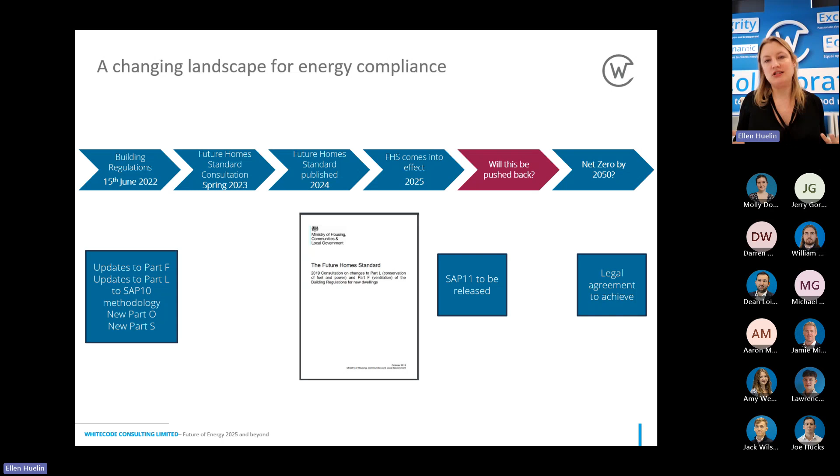The main thing here as well is that the government have made a legal agreement to meet net zero by 2050. So we've got to accelerate this carbon reduction quite quickly to achieve this. So this is where we're at the moment. I've put another timeline in, specifically to do with the Future Homes consultation. In December 2023, as I said, they released this consultation, and it very much gave the roadmap to what we're going to do over the next few years in terms of energy compliance for new buildings and conversions.

During that time, we've been reviewing it. Everyone can provide responses by the 6th of March. So if you feel strongly about any of these items, get on the website and respond, because every response is important, no matter how big or small. We're preparing a response to submit at the moment, and by the end of 2024 we're expecting a new set of approved documents to be issued, so a new Part L basically, based on the Future Homes and Building Standards.

Also this year potentially we're going to be having a general election, so this may affect it. Those of you who know about Part L 2013 and how long it took to get to Part L 2021 will know that potentially this could become a bit delayed as well.

So they've allowed either 6 or 12 months, depending on how the industry is responding, before they actually put the Future Home Standard into place. So sometime in 2025, probably in the spring, more likely I'd say autumn 2025, the Future Home Standard is going to come into force, which means that all your building sites that have not already started on site are going to need to comply with this.

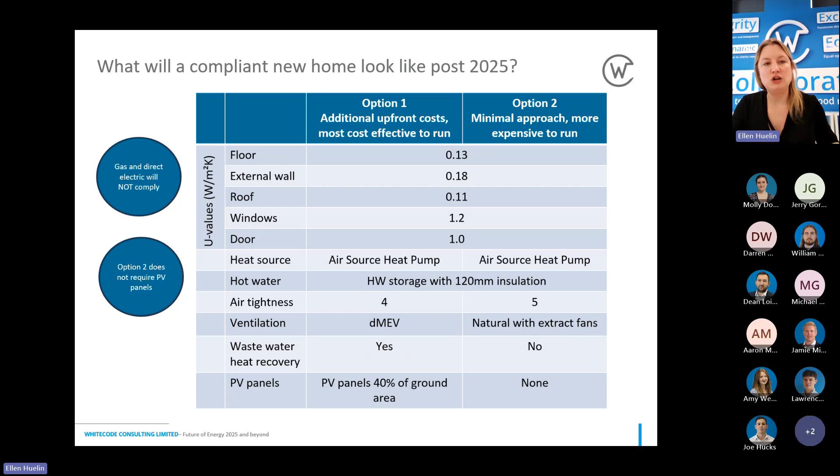I put there gas and direct electric will not comply. So we haven't really been using it so much, but outside of London, we can use direct electric under Part L 2021 and it still complies at the moment, if you add some other stuff to it, but for 2025, there'll be no gas, no direct electric. And as I said here, option two does not require PV panels. And I put the question here, should PV be mandatory?

Well, they've also added into the guidance that if you've got a large apartment block with 15 stories or more, it's proposed they won't include the PV panels in the notional dwelling because of the way that it's set up. So yeah, tall apartment blocks won't be required to have the solar panels. And those of you that have applications in the London area will know that generally speaking, we need to fully fill roofs with PV anyway to comply with the London Plan.

I won't go into it massively now, but it's likely the London plan wording is going to have to change in terms of energy, because what we just looked at there is currently achieving around 50% in Part L 2021. Under the Future Home Standard, that's basically just going to scrape a pass. So we're not going to be able to achieve that extra carbon reduction that the London plan asks for. So they'll have to change something there to fall in line with the Future Home Standard.

The other thing about PV, and looking just a little bit at houses specifically, is that if you're looking at 40% floor area of the house, the ground floor area, you've got a 3-story house, a bit like this one, with some dormer windows in the roof. The ground floor is 40 metres squared. You need 40% of that to comply. So I think that's the right amount actually, but you're going to basically need a certain amount of PV to comply with the air source heat pump and PV strategy.

And if you've got things like dormers or you've got east-west roofs and things like that, it's actually going to be quite challenging, I think, to meet that 40% requirement on your roof. So that's also something to think about. And I think we will be responding and saying we need to consider that it's not always possible to get your 40% floor area of PV on your roofs, depending on your design and orientation of the dwelling.

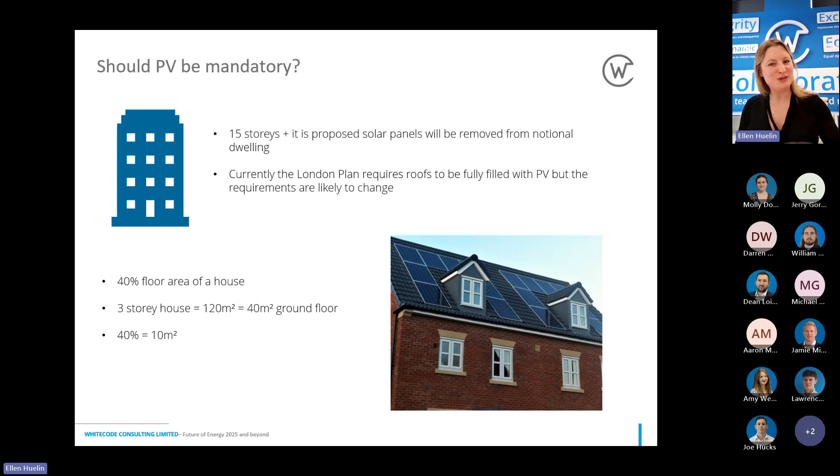I think in terms of the options, I personally would prefer to move into an option one house where you've got your air source heat pump and your PV together. And I'm going to show you why now. Because how much is it likely to cost? So these figures have been based on a 3-bed house. And this is information that has come from the Future Home Standard consultation. So they've done a bit of a cost analysis and I've basically just taken the numbers straight from there. So I didn't work these out myself.

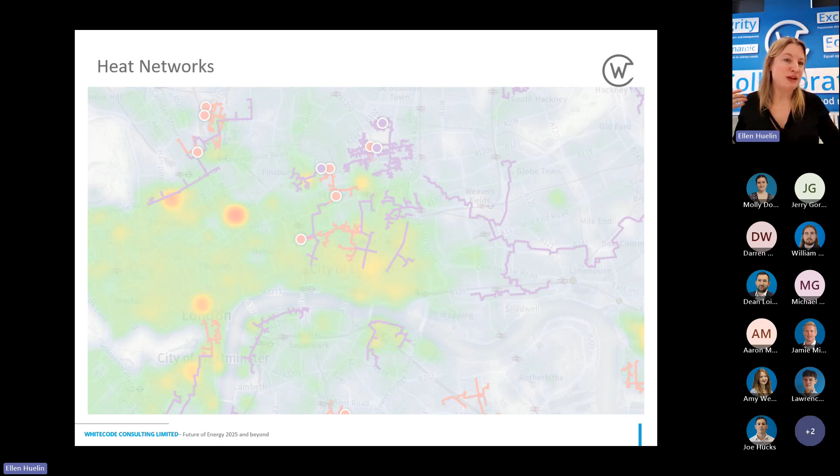Hoops to jump through to make sure that you can connect to it. However, obviously it needs to be part of Part L because it's being really pushed, especially in the London plan. So there's also a table that I put in here, which is the compliance if you're specifying a heat network. Everything else in option 1 and 2 remains the same, except the heat source, which rather than having an individual air source heat pump or a site-wide heat network, you connect to a 4th generation heat network, basically an air source heat pump.

And it has some minimum requirements, like the SCOP needs to be 3, and if you have really high primary losses, obviously it's going to count against you. So again, this is saying it needs to be a heat pump. There obviously are existing heat networks around London. You can see I showed you them in red there.

A lot of those have got gas-fired CHP, so you'd only really be able to connect to those if they start to decarbonise the heat networks and add in air source heat pumps and things like that. Otherwise, you won't be able to connect to those existing networks. So again, it's interesting to see what they're looking at. Whether it will actually work out in terms of heat networks, we shall see.

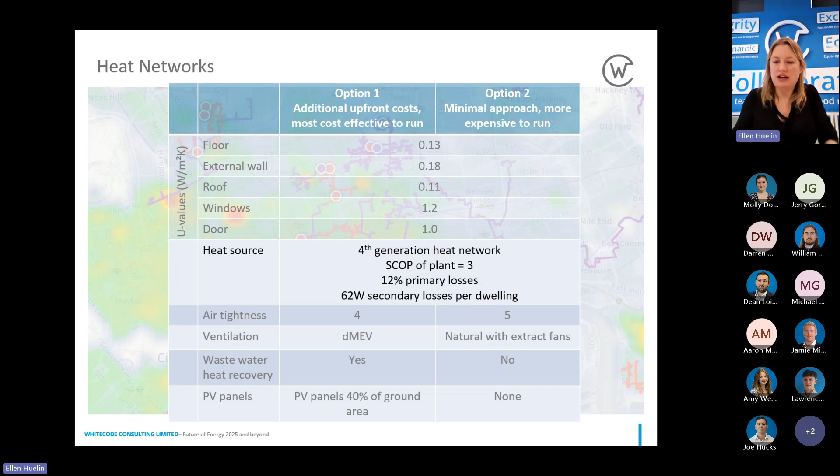Just to go then into non-domestic buildings. So with non-domestic buildings, the consultation is split between top lit buildings, which is like your warehouses, and side lit buildings, more standard commercial buildings like offices, schools, things like that. So there's a couple of different requirements for these because they are quite different types of buildings. In terms of fabric standards, as we've seen with the residential, they're going to be staying as 2021 standards. There's going to have to be an enhanced air tightness for the top lit buildings.

In terms of heating, you will be able to have radiant electric heating in the top lit buildings because, again, they're normally used for storage and things like that. But it will be air source heat pump for the side lit buildings like offices. This is not unexpected. Most offices have air source heat pumps, and new build offices have air source heat pumps now anyway. So these sort of things aren't unusual.

There will be an increased lighting efficiency required, up to 105 lumens per circuit watt as the minimum, and also an enhanced heat recovery efficiency. So these are the sort of standard assumptions. But again, there's going to be two options like we had for residential. So this is option 2, but it's the least preferred option, and it's to do with PV, and the percentage of floor area of PV that's going to be required.

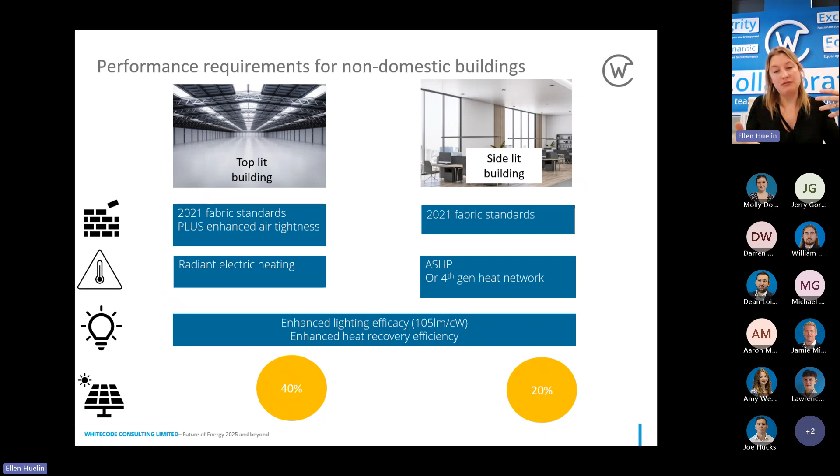So for top lit buildings, we're looking at the area of the foundation slab. Basically, you need 40% to comply. For side lit, it'd be 20% to comply. What they've said in the consultation is they'd actually prefer this option, which is option number 1, which is 75% for top lit buildings and 40% for side lit buildings.

So they're pushing people, saying, you know, we need to maximise the amount of PV on commercial buildings as much as possible. So I think really, in terms of Future Homes Standard, it's not a massive uplift to what we're currently doing. It's just this extra PV requirement, which isn't included at the moment. And there's a big opportunity to improve the energy efficiency of buildings by adding PV to them.

So this, again, will be in the consultation. People will be providing their comments to say, yes, we think option 1, this is why, yes, we think option 2. It looks as though it's going to go down option 1, which is the maximised PV.

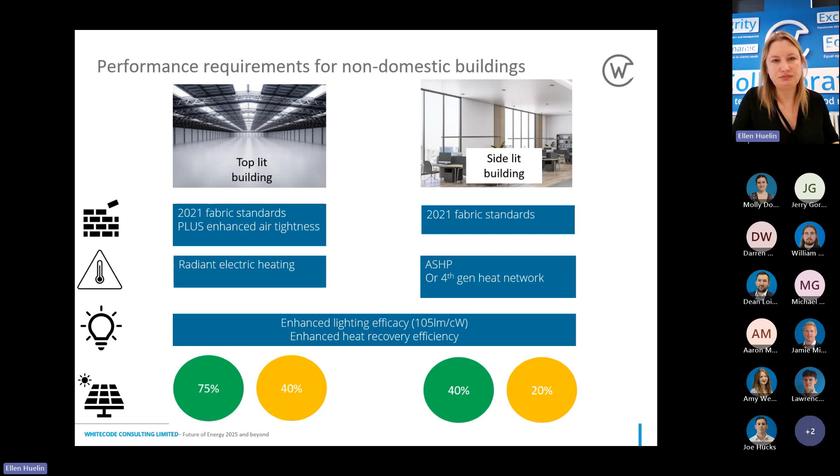In terms of services, some is for residential, some you can see is there for commercial, but the minimum coefficient of performance that is proposed for the heat pumps on the residential side is 3.5. That's quite high. Do we think many heat pumps can actually achieve that? Alex might have something to say about this later.

Yeah, so that's what's going to be going in as the minimum standard for heat pumps in residential, 2.5 for commercial. As I said earlier, we will need to improve the lighting to 105 lumens per circuit watt. That is also for residential. So at the moment, when we're doing our Part L 2021 calculations, we're putting in probably about 80, 90 lumens per circuit watt, maybe 75 to get compliance. That needs to improve.

In terms of insulating pipes, we love that here. So we do actually normally insulate to CIBSE CP1 anyway, but that's now going to be looking to become part of the Part L regulations to really improve that and make sure the heat losses are minimised through the distribution network.

In terms of commercial buildings, they are now proposing to include minimum efficiencies for lifts and escalators. Before, these fell outside of Part L, and to be honest, no one was really looking at how much energy these were using. But in a large commercial building, they can be quite a high percentage of the energy usage.

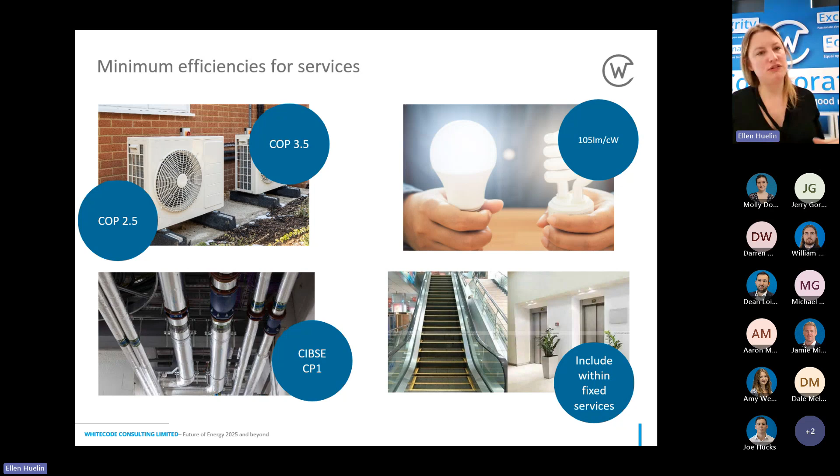We do a lot of BREEAM assessments, and we do actually look at energy efficiency of lifts and escalators in there. But what they're proposing is to bring it into Part L, so that there's going to be an incentive for people to select low energy lifts and escalators. So yeah, there is more information in the Future Homes Standard about services if you're really interested to go and have a look. But these are just some of the top ones that I thought would be interesting today.

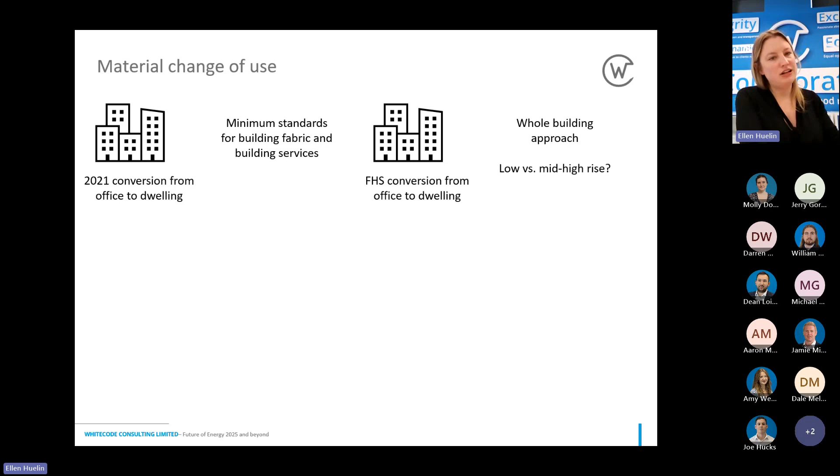I just wanted to touch a bit on material change of use as well. So for material change of use, which is essentially changing the use, for example going from an office to a dwelling, for a very long time all we've had to do is just meet minimum standards for building fabric and building services. So we'd have a set of U values and we'd say, yeah, we're just going to build to that, that'll be fine.

And quite often we'd say, oh, actually, we can't insulate that wall here, and do a bit of a payback calculation to show that it was not technically feasible. So there was a bit of wording that mentioned that. And so a lot of buildings actually are being built with quite poor insulation, and also because they didn't have to fully comply with SAP, they were putting in electric panel heaters, electric immersion heaters, and actually costing the occupant quite a lot to run those buildings.

So yeah, as I said, this is what we've been doing for a long time. The proposal for the Future Homes Standard is to move to a whole building approach, a bit like we do for new builds. So it's not just going to have to comply with minimum building fabric standards and minimum building services. It's actually going to have to essentially pass the energy calculation.

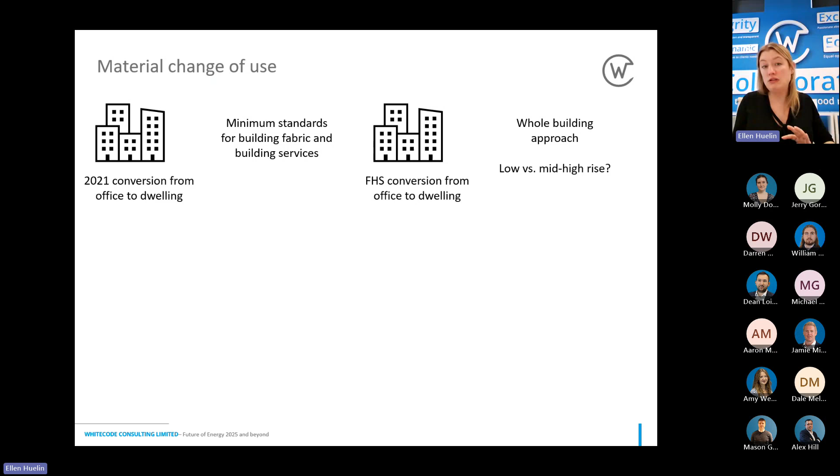So looking at it as a whole, because there were definitely some gaps in the material change of use, which was actually producing some poor, not all of them, but some poor conversions. So there's also been some discussion around whether low versus mid to high rise conversions should be considered differently. So here is another table.

So as you can see, there's a lot of numbers in this consultation. I've tried to make it as digestible as possible, and I'm happy to send this out afterwards for people to have a further look if they want. This is just to compare what they've suggested for material change of use, so the low rise versus the mid and high rise conversions.

There's a little bit of difference in the target U values, whether you've got something that's low rise or mid to high rise, just because it understands that it's easier to make adjustments if you've got more wall space to do it. So it looks like the U value for the external walls is going to have to come down quite significantly. If you've got a solid external wall, your U value for that could be about 2.1, so to improve it to 0.18 is obviously quite hard.

So if you've got a solid stone wall, for example, it's more likely to be a low-rise building. Sorry, I went around that bit the wrong way. But yeah, if you've got a solid wall and it's a low-rise, it's quite hard to insulate that, hence why the U value target is not as hard to achieve. So it's 0.3. If you've got mid to high rise, it's more likely to be easier to insulate that and improve the U value.

Again, the windows at 1.2, if you've got an old building, are likely to have to be replaced unless there's any particular listed or historic requirement. And again, you can see heat source is mainly air source heat pump, but for mid to high rise, they are looking to possibly allow electric storage heaters, just because of the size of the building it might be more appropriate. So I think probably the only place we're going to see electric storage heaters or electric panel heaters allowed is in mid to high rise conversions.

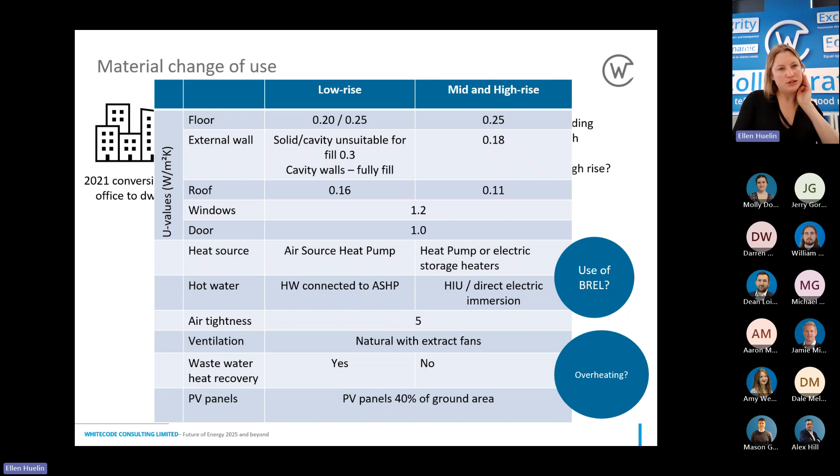So they've noticed this because there's been poor build quality on and off throughout the years, and what it's resulted in is higher bills for the occupants. So we really want to try to move forward towards this net zero target.

I really feel like this is going to be a massive focus in the next few years, because we're going to get the design so good, but it doesn't matter if you don't build it correctly and it doesn't actually perform in the real world.

So what the Future Homes Standard consultation is suggesting is that we go for voluntary post-occupancy performance testing. Could be a little bit tricky because you're obviously going to have to get the occupant to agree to it. And how they're going to do it is use what's called smart meter enabled thermal efficiency rating, SMETER. It sounds complicated, but I think it's basically a smart meter, and then you pair it with some sensors in your house so it can actually work out how your house is performing.

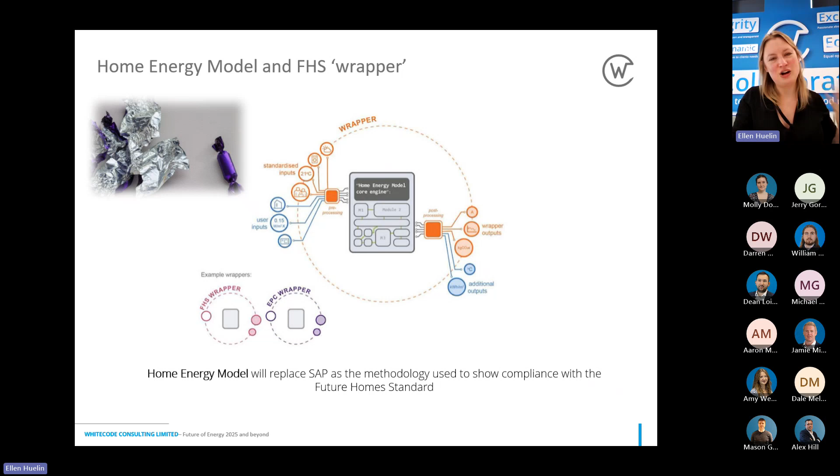We're all going to have to learn how to use it and then help our clients with how to interpret the results. There's actually a whole consultation on the home energy model as well, lots of information for those of you who are interested, but I just wanted to go through some of the main changes we're going to see as we move from SAP to HEM. Firstly, occupancy. Occupancy in SAP was previously based on floor area, and they're proposing in the home energy model to base it on number of bedrooms. So it's a bit more realistic.

Again, hot water demand is going to be more accurately based on occupancy. And because we've been introducing a lot of low flow appliances for compliance with Part G and London Plan, the hot water demand has actually gone down. So they're going to be reducing the hot water demand assumptions in the home energy model.

The carbon emission factor, there's some small numbers there. Currently, we're assuming 0.136 kilograms of carbon per kilowatt hour. The Future Homes Standard is going to assume 0.086. So it's gone down again. Bearing in mind, back when we were doing SAP 2012 or Part L 2013, it was 0.519. So we've massively slashed the carbon in our electricity grid, because we've been decarbonising the grid, increased use of wind, things like that, which we'll go into a little bit more in a minute.

The weather. SAP used East Pennines, which is absolute worst case far up in Scotland. Future Homes Standard is proposing to use regional data. There'll be a lot more opportunity to put in innovative technologies. At the moment, it's very poorly executed in SAP. If there's something that doesn't fit the box, it's very difficult to get put in.

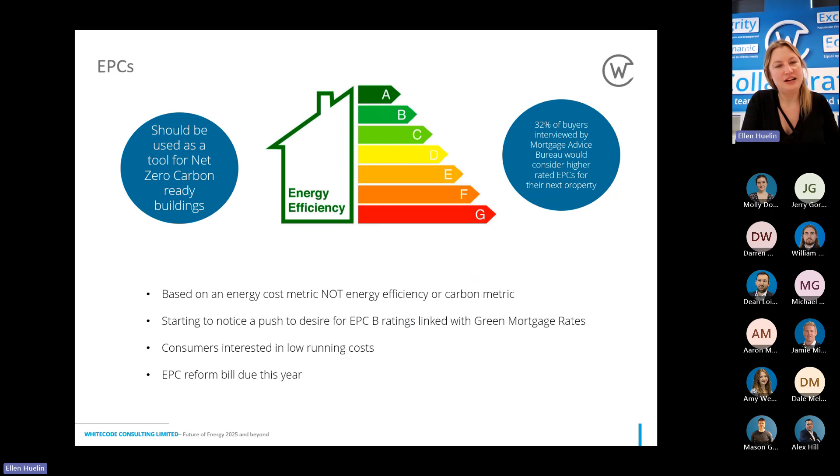Me and my colleague went to a national conference on Tuesday, and there was someone from the government there talking about the EPC reform bill and basically saying they need to change the EPCs, but they also need to be quite careful, because a lot of companies have already set up some guidance based on EPC ratings, and funding based on EPC ratings as well. So it's really important to make sure that EPCs are correct. So yeah, that was my whistle stop tour of the Future Homes Standard.

Alex should be there. Hopefully you can take control, Alex. Yep, great, if everyone can hear. Yeah, can you take control? Yeah, I think so. I've hit the take control button, waiting for approval. You need to approve me. I was about to click deny, then give control. There you go. There we go.

Okay, so I noticed we've got some air source heat pump people that I know on the presentation. So there are some energy challenges that I'm going to talk about. There's stuff we can do things about, and there's some stuff we can't do much about. But this hopefully will give everybody a bit of information as to the problems we're all going to have.

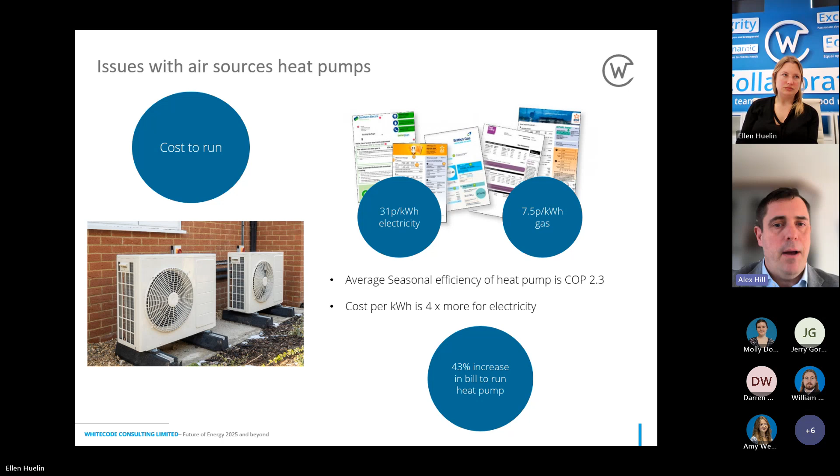In new builds where energy is low, where they're supported with PV, it makes sense. I'm doing it in my own house build. But in the retrofit market, we need to be very careful of people like British Gas saying come and fit a heat pump because it's efficient. People deem efficiency to be cost to run, and actually just from this very simple maths, it's going to cost you potentially 40% more to run your heat pump than a gas boiler.

So we've got a life expectancy that we've seen operationally lower compared to gas boilers, and the capital cost is significantly higher. And really, although the government is pushing heat pumps from an efficiency basis for existing properties, the numbers just don't stack up. And until heat pump suppliers start to reduce their external costs down to what you can buy a VRF external condenser for, there's still going to be quite a disparity between the installation of a heat pump and a gas boiler. And I do know people in the trade are talking about buying lots of gas boilers before they're made illegal, because it's a significant cost difference between the two.

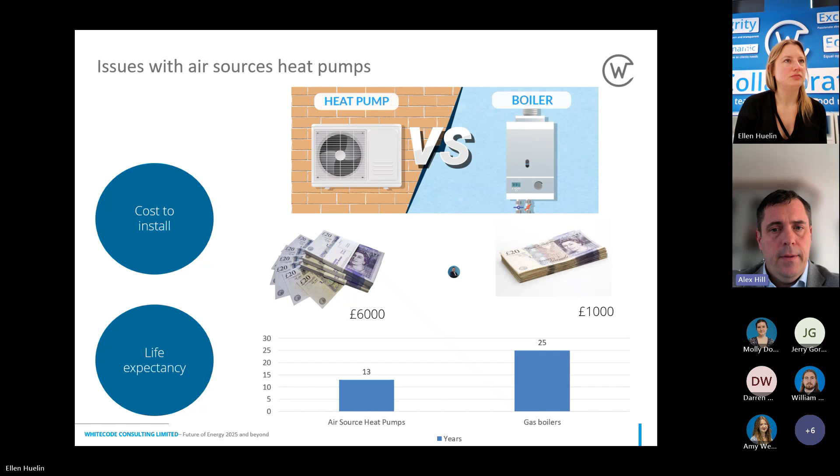The other problem that we've got is the actual installation of these things. So according to the government, last year we built 230,000 homes with a target of 300,000. But their target for heat pumps is to install 600,000 by 2028. Obviously, the difference is made up in the retrofit market. We actually only installed 55,000 in 2022.

The problem that we've got is that there's very few people at the moment that are F-gas qualified and are able to fit these heat pumps. So we've got a big challenge to upskill our labour market to install the right amount of heat pumps and be able to change components.

Now, some suppliers are dealing with this very easily by saying, well, actually, we're not going to service the refrigerant parts within my heat pumps. We're just going to swap them out. And that we're going to need to develop as the market develops and the products develop. But we do have a massive skill shortage when we've only got roughly 2,000 F-gas qualified people in the UK, and we want to get to 600,000 heat pumps. So there's going to have to be a massive shift towards refrigerant as effectively we wean ourselves off of gas.

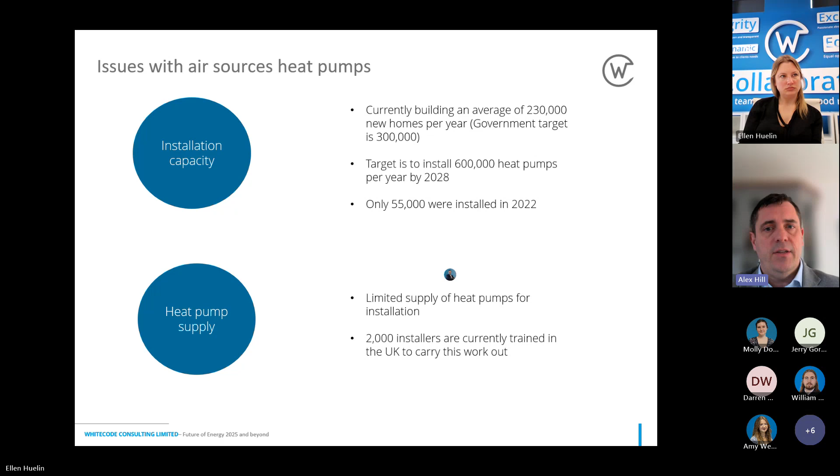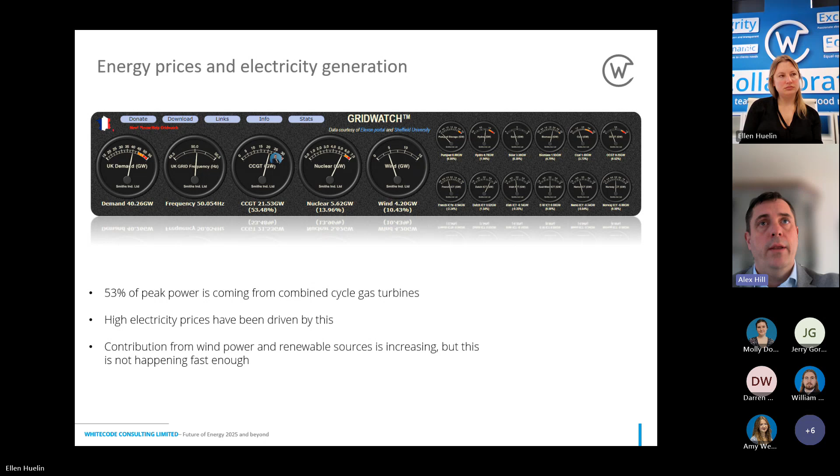We've kept some capacity, some of which is designed to be switched off in 2026, and we're now talking about potentially having to leave on some other oil and coal stations that were due to be decommissioned, because there is a crunch point in our demand. And I'll talk a little bit more about that on the next slide.

So max capacity at peak times is around about 42 gigawatts. In fact, last winter we had 2 situations where we were so out of power, where something went wrong in a power station and a turbine didn't fire. We had to emergency import power from Belgium at a significant cost. And I said to the head of SSE, look, have we got a problem? And she said, absolutely. So we're going to talk about electrification now.

So if we take a standard gas heated home, there are 24 million of them in the UK, roughly 25 million, depending on what you read, we work on the basis of it using 1 kilowatt of electric across 1,000 homes, when we scale it up. Now we think about our new build homes, that are probably going to have a heat pump. According to the consultation that Ellen's just mentioned, probably not going to have PV, which is, in my opinion, nuts. Then we're going to add in our heat pump. Okay, let's say 5 kilowatts for a house.

Let's add in your car, because by 2030, most car manufacturers are going to stop making petrol engines. So let's add that all together. And that's 12 kilowatts of electric that could quite feasibly be operating at the same time. It's winter, your heat pump's on, you're charging your car, and I've been generous with only a 7 kilowatt load, and that could potentially mean we need 12 times more power for each home we build like this. Put it another way, every time we build 230,000 new homes, we add 1.4 gigawatts onto our problem.

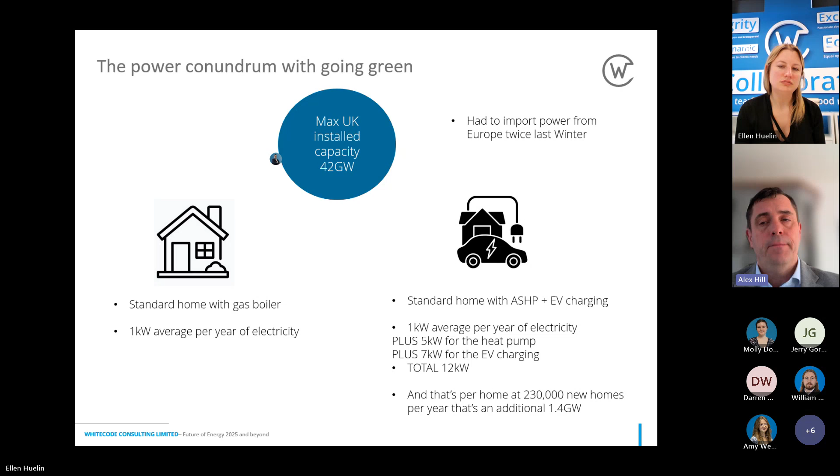Now, when we diversify that load, it's not all going to be happening at the same time, but the head of UK Power Networks that's looking at his grid capacity said, we've got a problem. We've got a problem because the electrical demand, which for years and years was tailing off due to energy efficiency, today is going the other way due to the electrification of both our heating and our car charging. And actually, probably the biggest effect on the UK national grid is vehicles. So I'm going to introduce you all to a term that anybody here that's old enough will have heard.

Will have heard the term load shedding. So in 1973, the winter of discontent, we had coal miners on strike. They were refusing to pull the coal out the ground. Most of our power stations were coal or oil, and we ran out of coal in our power stations. That meant that our installed capacity suddenly went down, and we had no choice but to load shed.

Now, those people here from Whitecode will have heard load shedding because of our office in South Africa, and the picture on the right is me in South Africa with 2 candles in a property that was experiencing load shedding. So load shedding is where we turn off the power for 2-hour windows to share the installed capacity. South Africa has a 5 gigawatt problem, and according to the Telegraph 2 days ago, they are predicting that we will have potentially the same issues in winter 2028, where actually we may run out of power.

Now, interestingly, the UK is potentially dealing with this in a very innovative way. So the first thing that we're considering doing is paying people to switch their power off. So I've been part of a trial with Octopus Energy to use less power during peak times and get paid for it. So this smarter energy use within the grid is something that people are very much considering, coupled with people like British Gas and Centrica that are looking at batteries that they can control centrally.

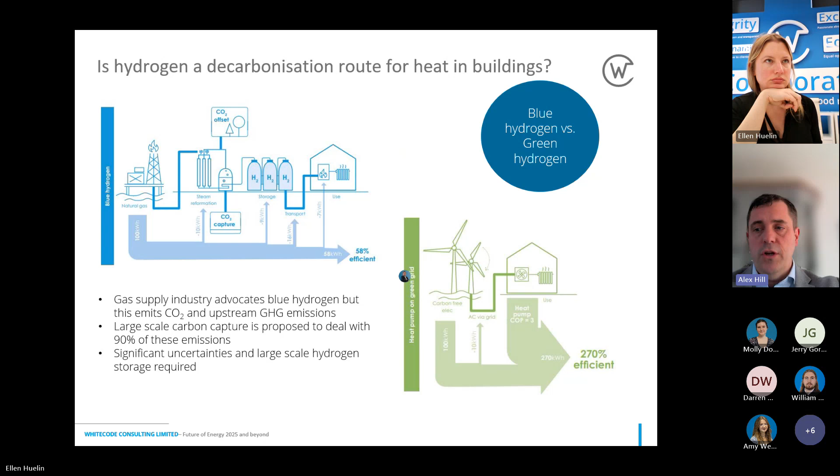Unfortunately, the government isn't tuned into this, and they started and created a hydrogen roadmap, which they swiftly withdrew. It was out for a year, and this was trying to give some certainty to producers of hydrogen and those people manufacturing the plants. However, there are companies out there that can see this as a way to create energy in very small footprints. So, for example, opposite our office, the Kimberly-Clark plant has put in plans to extract a very large amount of hydrogen from water.

It's very important to say, although heat pumps are very good at what they do, they require a large footprint to create energy and heat, whereas hydrogen uses a similar footprint to that of gas. So for the retrofit market, and even those that are trying to create a large amount of heat, probably heat pumps are not the solution. But with the government still in limbo with hydrogen, unfortunately, it's probably too far away for us to even consider it as an option.

And in fact, I think Ellen mentioned that hydrogen doesn't even feature in any of the consultations for the new energy models or the calculations, and therefore it's not even on the government's radar. And as I've pointed out, we need to be very careful with our installed capacity within the national grid, and the government is in fact probably sleepwalking into a big problem, and there is a potential other mix to this solution, i.e. hydrogen, that's not even on their radar, which is highly disappointing, I would say.

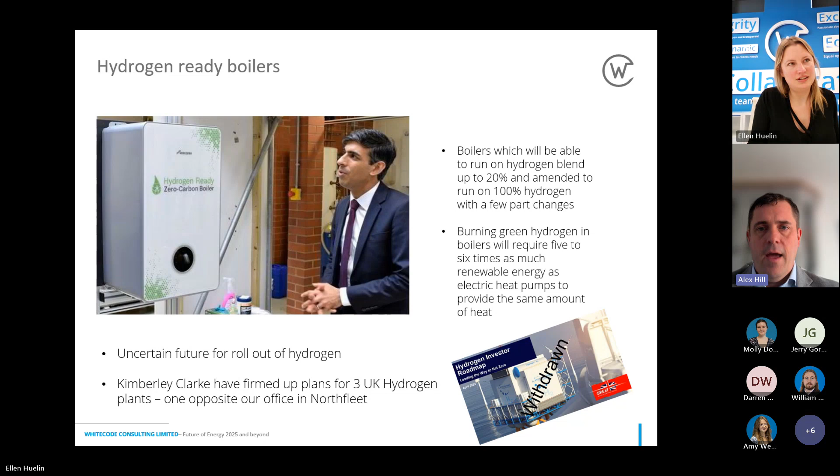I think that. There's one more slide, isn't there? Yeah, yeah. Sorry, it's not changing because my mouse is gone. Hold on. Yeah, there we go. Final slide. Yeah. So the final slide.

So what's the future of energy in 2025 and beyond? Building regulations and future home standards are pushing us down the heat pump route, which is fine, but there are issues with capital cost, supply and power availability, and we have seen sites where we have real issues with power availability, and we need to use heat pumps. So this will become a bigger problem for the grid as we switch to this technology. Like all good design guides, we must focus on fabric first. For me, that is not just new build. We are dealing with lots of retrofit, and part of this improvement must include the improvement of the fabric before we fit a technology such as a heat pump.

And we must also remember that we build 230,000 homes a year, but we've got 24 to 25 million stock, a good majority of which use gas boilers. So we mustn't forget that when we're legislating. Hydrogen rollout, I think, needs to accelerate, needs to be included in the home energy calculations, and would be a great solution for decarbonising existing buildings. And in our opinion, it's nuts that we're not being legislated to put PV on the roofs. See previous note about installed capacity. PV and a battery system in all new homes that could be centrally controlled by your energy provider, for me, could avoid load shedding. Okay.

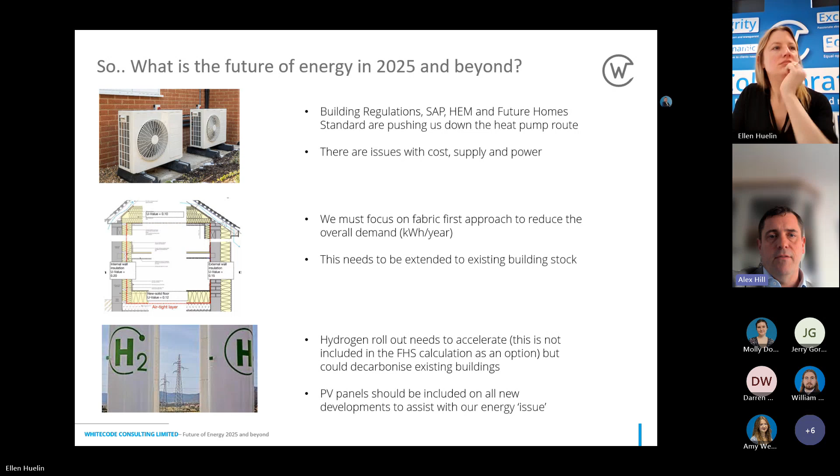Secondly, Darren says, as the COP is only based on the heat pump, should there be a measurement of the entire heat pump system, such as the seasonal performance factor? Yeah, I think that would be better, don't you, Alex? I think that's why they're looking in the home energy model to calculate all of the pipe work. There's going to be some kind of fudge to look at the actual length of pipe work, much like in the passive house standard, where you've got to keep certain things close to keep the energy and the performance up. I feel like there will be another series of factors where we're told you can't have your air source heat pump 10 meters down your garden. That will give you a negative effect in the home energy model.

It just makes sense that we start thinking about the whole system now when we're thinking about heat pumps, because the problem is we've all seen other manufacturers saying my external box has got a COP of 6, but when you stick the seasonal efficiency in, we're seeing a 3, and in actual operation we actually see 2.3, and that for me means that in the assessment of the seasonal efficiency and the operational efficiency, like Ellen said, we've got to close that performance gap.